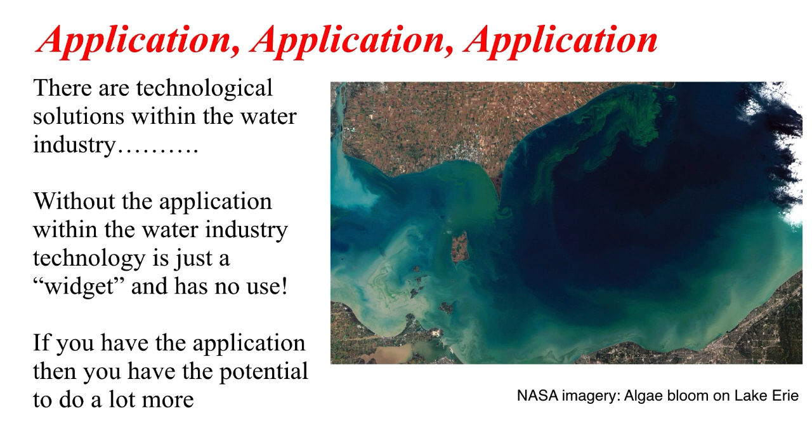The engineers said, we want to put a flow meter on top of that penstock. And for anyone who knows flow, it's not going to work. But also, they wanted it for all 6 penstocks. And of course, if you put flow on each of the areas, the penstocks were going to change all the time, what we call hunting.

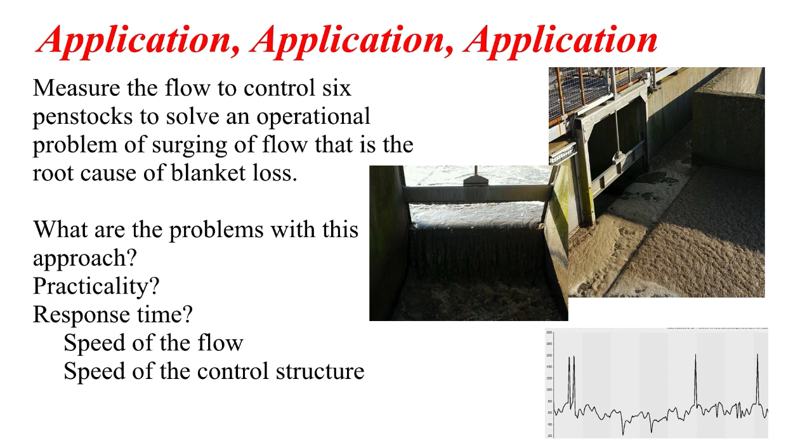But if you do have an application, this is a case study that Swan produced a number of years ago with Yarra Valley Water. It was a very long journey for a smart water solution. And actually some of it was very basic. It was measure, set up district management areas, measure what's going into those areas, what's going out of those areas. Yes, use sounding sticks. Yes, use a number of techniques.

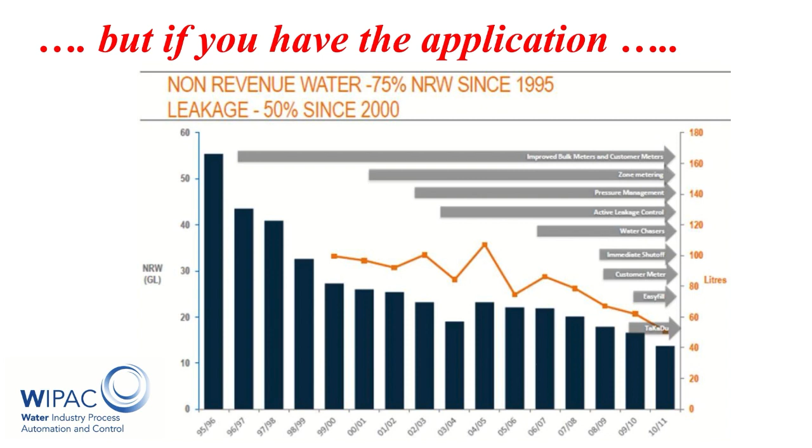The final technological solution made a relatively small difference. At the end of the day, it was a whole suite of solutions. It was basic common engineering sense that delivered a lot of the savings to start off with, but actually great application. The leakage was at the best part of 50%. And by the end of it, it went down to about 12%. Not fantastic, but actually pretty good in modern terms.

But before we get too complex, what are the basics? What is smart water? We've all heard Internet of Things. We've all heard smart cities, big data, small information, data analytics, real-time control, advanced process control, smart water networks, smart wastewater networks, artificial neural networks. We're hearing about machine learning, artificial intelligence, data mining. It's mind-blowing.

But really, at the end of the day, for me at least, and this is a very arguable point, it's a case of using the data that we've got, looking at the information that we need, perhaps doing a gap analysis, perhaps taking instrumentation out, looking at instruments that we don't use, prioritizing the maintenance of the instruments that we do use and we do need, and using that data correctly.

Because at the very smallest, you can actually look. There's a huge amount of data, and I think I certainly put it at the UK producing about 300 million pieces of data every single day. You can't possibly look at all that. But is all that data needed? That actually says 400 million pieces of data a day, but yeah, much of a muchness.

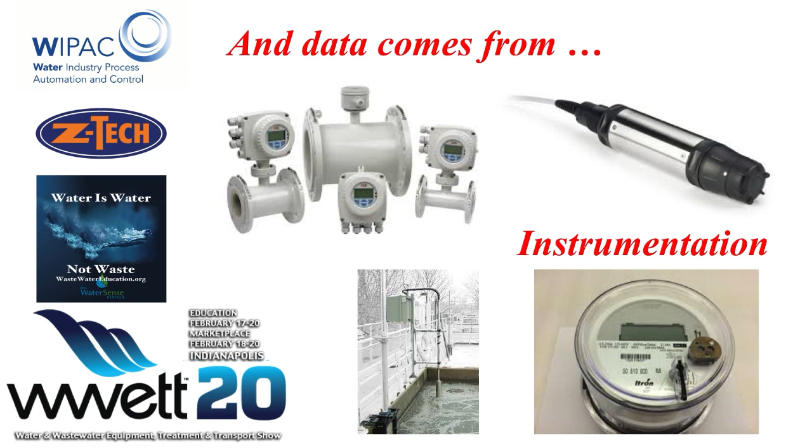We've all heard Sir James Bevan talking about the UK running out of water in the next 25 years. Well, in that case, yes, there's work to be done on PCC. There's work to be done on reducing the water that customers use. And of course, there's work to be done to look at leakage. And this is a massive project in the next AMP for every single water company. But it's how do we use that data? All of the water companies in the UK will have a DMA. Of course they will. How do we use that data from the DMA? How do we make sure that data is right?

And yes, making sure the data is right, maintaining that instrument is absolutely vital, because it only has to be a small amount off on a large meter, and that can account for a huge amount of leakage, which may not be true. It may be meter error, and certainly that's been seen in the maintenance of DMAs, either through bad installation or maintenance problems or whatever. On the Clean Water Network, yes, it's been seen. Yes, it's a problem. Yes, some of that target next AMP is going to be done on the maintenance of instruments. Absolutely fantastic.

But looking at the instrumentation life cycle, I mentioned this in a different way earlier. When you put an instrument in, you have to ask yourself the question, what is the purpose? What am I hoping to get from this instrument? Is it a regulatory purpose? Do I have to have that instrument in place for regulatory reasons? Abstraction monitoring, wastewater discharge monitoring, etc. Maybe. Is it for efficiency purposes? For example, is it for operational efficiency purposes?

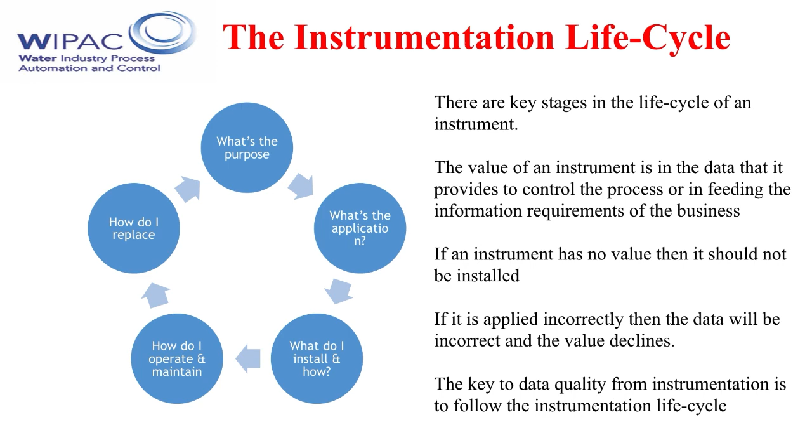And then at the end of that cycle going, well, I'm looking at replacing this meter, but should I? What have I actually used it for in the past 10, 15, 20 years? If I haven't used it, don't install it again. If I have and it's become a vital part of the process, then yes, we will. So we've got to understand the value of instruments more and more. We've got to look after the instruments that we need more, but actually the instruments that we don't need is something that we can rationalise on and save.

But what is that? What is the information? In terms of the smart water industry, it's a case of asking the question, well, what value is the information that we're going to get from this instrument? So in fact, it is part of the people process and it's stakeholder engagement. It's a case of asking the head of a company, what information do you want to see every morning?

And going all the way down through that company to the guys on the front line, what information do you want to see? Doing the gap analysis, saying, well, actually, we've got that already. We just need to shuffle things around a bit. Or actually, we do need to install another instrument here to get that data source, that information source, to allow us to make an informed decision. And once that data and that information is valued, then at the end of the day, that instrument will get looked after. The people and the process will be followed to look after that instrument because there's a value associated to it.

In the past, we've just installed instruments for the sake of it, and the value is not understood. And if the value is not understood, it doesn't get looked after. If it doesn't get looked after, people go, it doesn't work, and we fall into the trap of not using the data that we've got, and the value of instrumentation is not seen, and that means that we don't use it properly.

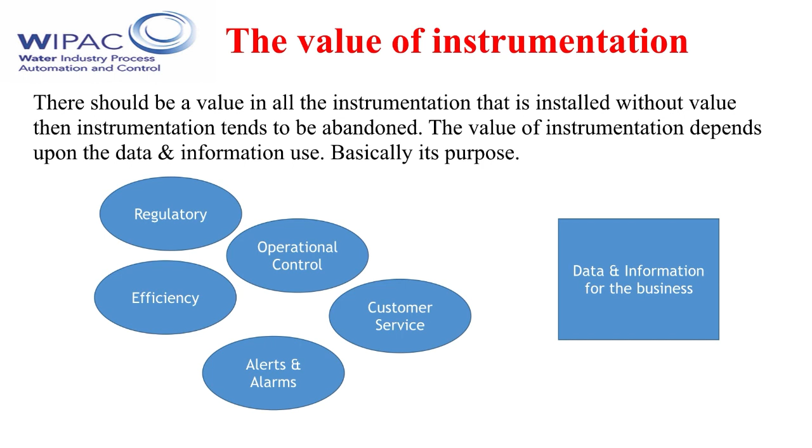But again, it's knowing what that is. Is it regulatory? Is it efficiency? Is it operational control? Is it alerts and alarms? Is it customer service? That all leads to the data and information for the business as a whole. But once you install the right instrumentation, you don't necessarily have to put a complex telemetry SCADA system in.

That means something. If somebody had picked that up earlier, if there was a system in place that allowed that pollution event to be detected, guess what? You could have prevented that whole pollution event from starting in the first place. And pollution events is another big thing in the next asset management period in the UK, as it probably is around the world. We've got some incredibly tight phosphorus consents coming in.

Can we reduce pollution events, stop the phosphorus from raw sewage getting into the river as much as we can by, say, enabling a smart water network to prevent phosphorus consents which are, quite frankly, 10 times lower than the old drinking water consent? That's staggering. Okay, it's an annual average in the UK, but a phosphorus consent that's 10 times lower than drinking water was in the old 1989-1991 regulations.

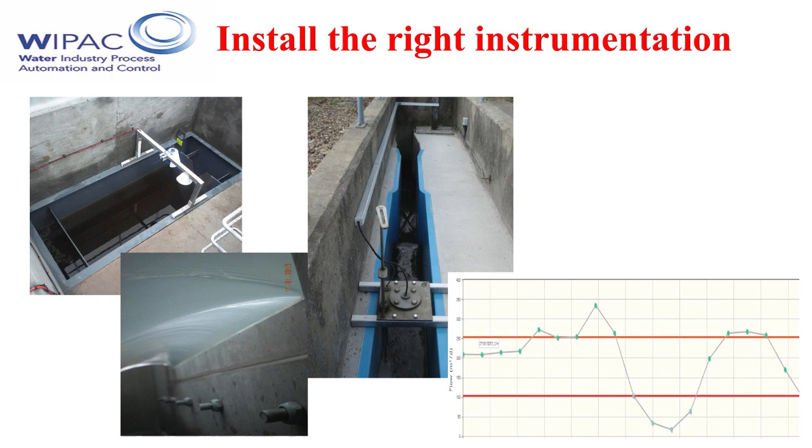You can see an electromagnetic flow meter caked on the inside with what was in fact ferric oxide from ferric dosing. Why did that happen? Because of incorrect dosing, because of incorrect flow measurement. That now is going to cost about 50 to £100,000 to resolve, because somebody's going to have to basically dig out the pipes and replace it.

The classic there, if nobody's actually worked out what the problem is: installation. That flume was actually installed backwards. It will work after a fashion, but of course, in that foreground, you've got some ferric dosing. So actually, are you going to be dosing the ferric properly? Because that flow meter isn't going to be recording properly. It's about getting the basics right. And actually, you can work out quite a lot from just looking at the basics, looking at that level 2.

Is that a problem within the industry? Yes, it is. Yes, there are people out there to help with that. But actually, that basic maintenance means quite a lot. Because on a weir, on a rectangular notch weir, on an electromagnetic flow meter, these can affect the measurements and hence the data quite a lot. I've certainly heard the argument of, yes, well, we can tidy up that data at another time. We can tidy it up with algorithms.

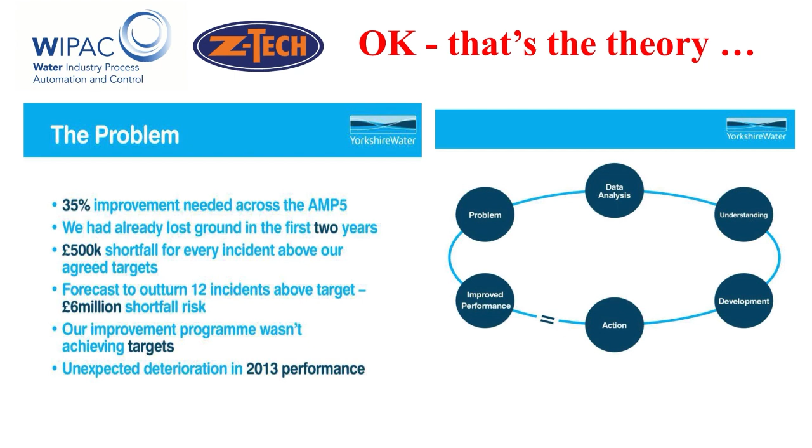Yorkshire Water's performance was suffering and needed improvement. They were taking a cyclical approach, basically saying, okay, we'll clean this because we know we should, based upon X, Y, Z. They weren't looking at what was happening within the system. They actually had the data, but they needed to rearrange the way they looked at it and the way they designed their process response. And that's when they developed this blockage timeline and achieved a 21% reduction in pollution incidents.

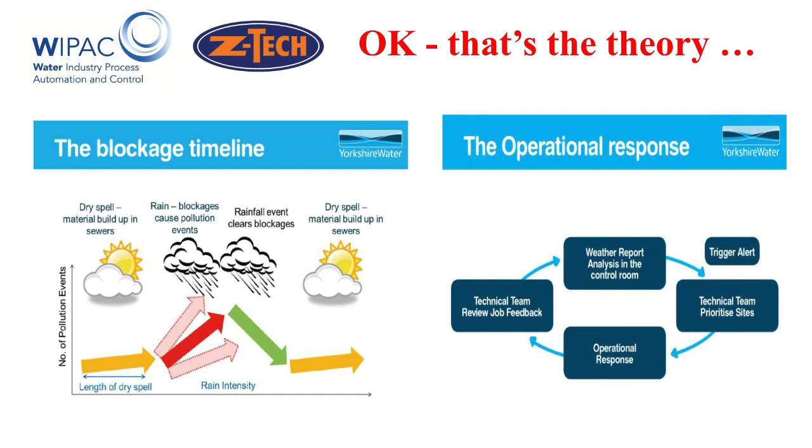Now, most water companies would go, 21% is amazing. That's fantastic. Let's keep going. What else have we got to do? And that was changing that cyclical approach.

Years and years ago, a chap called Jody Cockroft of MWH did a project for Southern Water down at Eastney. They had 2 flood events very, very close to each other, almost 20 years ago now. 300 properties flooded, 530 externally flooded, and the Portsmouth Naval Yard. Portsmouth Naval Yard, of course, was a strategic defensive asset, and it was not good that it got flooded and affected the defence of the nation. So it all went to the House of Lords.

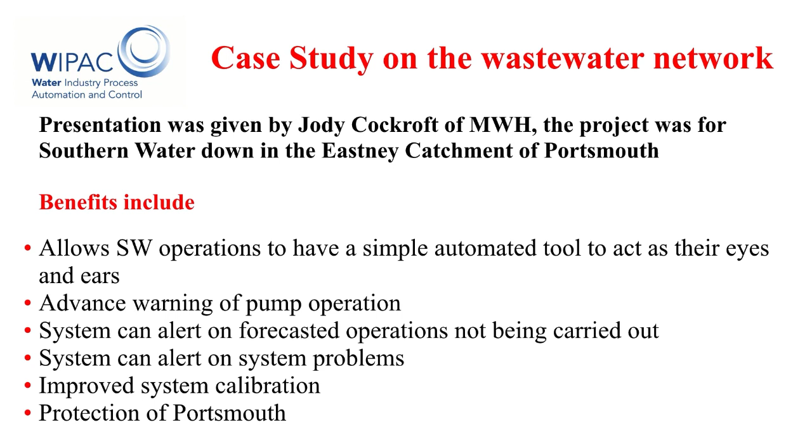And that Eastney project did look at the whole system, how to bring the technology, the people, and the process together. And it was an incredibly smart system. But often, where is it all? Yes, with Eastney, they had a look. The sewer level monitoring was a problem. But again, we've got to treat the whole system together and see what we can do to play tunes within the system to get the system working as a whole.

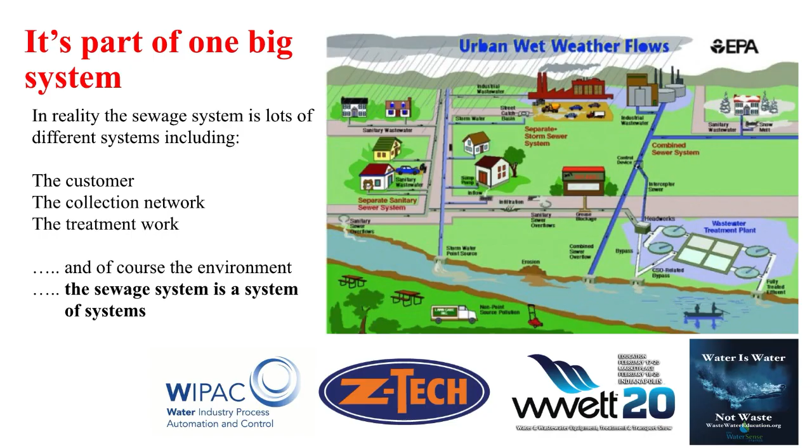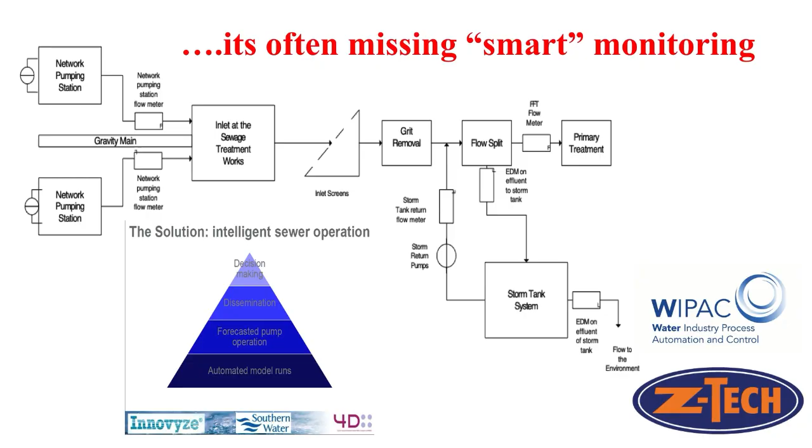So I'll go forward. A study done by Professor Butler and Fanlin Meng as part of her PhD at Exeter looked at operational control-based permitting. And the one thing that picked this up is something where I think we as an industry should be going, which is looking to control within the network, looking to control through the process to treat as much of the flow as possible. Can't always be done, and if you get a storm that goes over the capacity, then okay.

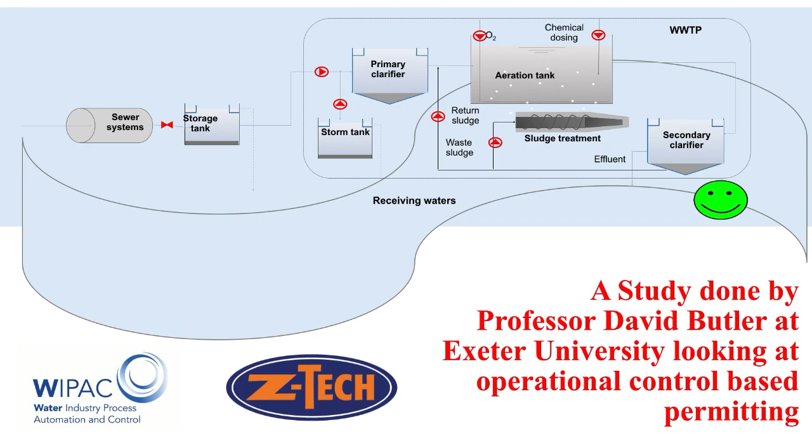But the work that Fanlin Meng did, which was absolutely fascinating, and she presented at a workshop that I was hosting, was definitely the case of, do you know what? We can get a lower cost at the treatment works for better overall environmental quality. So we can get a better outcome for less money. And if you say that to somebody, they're going to go, well, how do we do it? Unfortunately, it is difficult. And here's what Fanlin showed.

But at the end of the day, the Environment Agency brought out operational risk based on process-based control. But really, the financial benefit just wasn't there, because we didn't look at all the benefits. If we did have operational process-based control-based permitting, then we could get a better result for less money. And that's probably where the benefit lay. Unfortunately, the feasibility study didn't point out that eventuality. Maybe it's a case we look at that again.

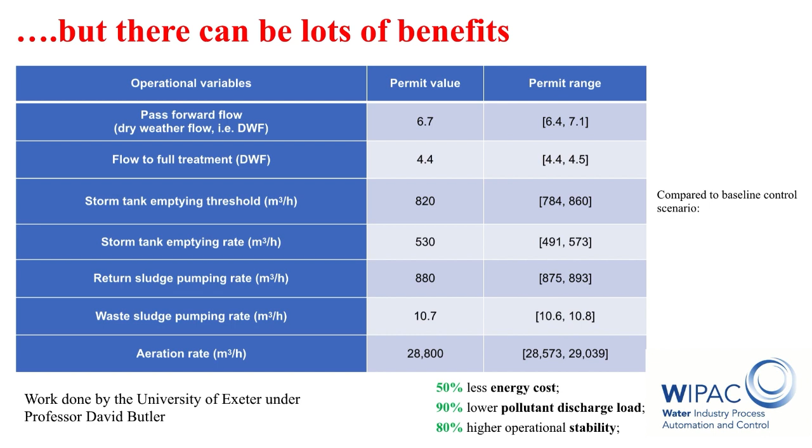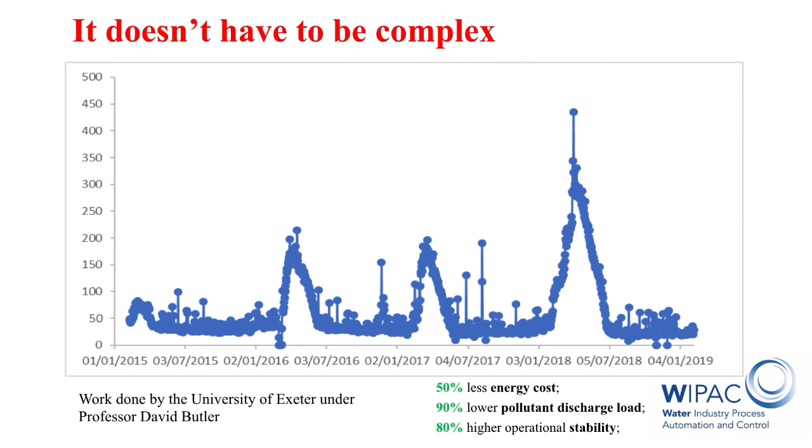But it doesn't have to be complex. This is a case study from a works that I know very well. And smart water is not going to solve the problem, but we have the technology for a smart water industry, but what does this actually mean in practice? We heard earlier this year in the UK, Sir James Bevan talking about the jaws of death and the water industry in the UK running out of water.

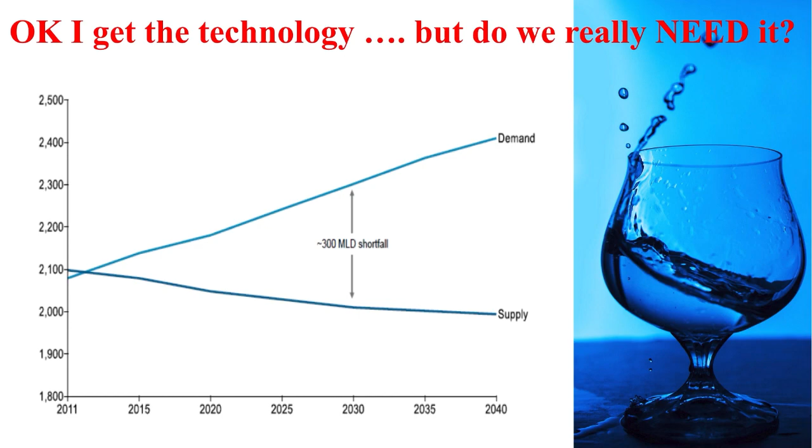What we can see in this graph is an example from a few years ago. But yes, demand outstripping supply. In this particular case, 300 megalitres per day shortfall. What we can do about this is actually probably a multifaceted approach. This case study is one I mentioned earlier, is from Lisbon, Portugal, and was delivered by Andrew Donnelly and the local water company, EPAL.

Subsequently to this, in a presentation earlier this year, Andrew Donnelly presented that things had crept back up. But they found the root cause of the problem was mainly on the trunk mains, and so addressed the problem, and again the leakage percentages were back down. So this is using the data that we have within the water industry to a good extent and finding out where the problem is, rather than just taking a routine replacement asset management strategy.

But actually leakage reduction isn't enough. And this is where we've got to look at how we can use AMR, how we can use AMI, how we can use smart meters to address the problems of customer side leakage, which we know as an industry is a massive problem, but also per capita consumption. In the UK, our per capita consumption is around 140 to 145 litres per head per day. Other countries much higher. Where you have it much lower, in countries such as Denmark, it's because there is a culture that doesn't allow the wastage of water.

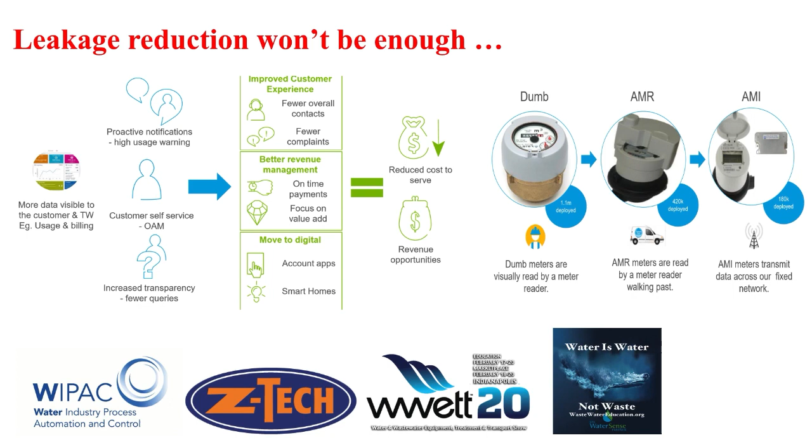If you haven't got that naturally within your culture, then there's work that can be done using smart water meter data and influencing customers to get reductions in the consumption. And this we can see in the next case study. This was something done with Anglian Water in their shop window and a company called Advizzo. And as we can see, 4,500 properties in the trial, 18,500 litres of water per day saved, and roughly an 8% reduction in per capita consumption over that time period.

It isn't just per capita consumption, it isn't just customer side leakage, it isn't just the leakage that the water companies are responsible for. It's actually a combination of a variety of different sources that the industry is going to have to look at. And this is where the smart water industry becomes a tool to drive this together.

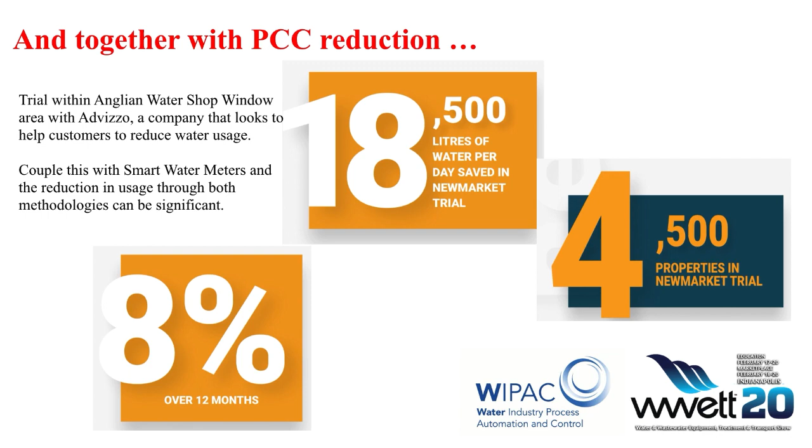We've come a very, very long way since Bazalgette. We can no longer build giant sewers. We can no longer build 120 miles of triple line brick sewer as Sir Joseph Bazalgette did. Coincidentally, we are, of course, doing that with the London Tideway project. But that is an exception rather than a rule. We've got to look at how we can not just deliver something from an infrastructure point of view, but deliver it in operational management. And that is where the smart water industry really comes to its forefront.

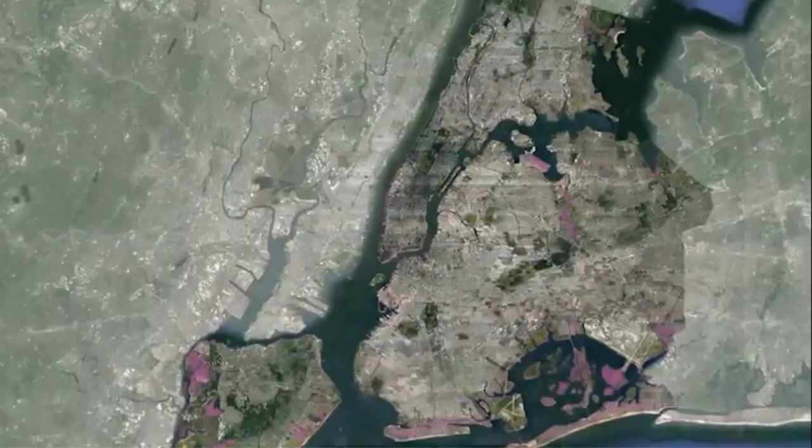After Sandy, Horton's data was used in modeling to see what New York would look like with 6 feet of sea level rise by 2100. So this is a satellite map showing New York City without any flooding. Shown here is Broad Channel, the Rockaways, Lower Manhattan, and over here is Staten Island. If you get 6 feet of sea level rise, the everyday average high tide is going to start flooding a lot of neighborhoods. It's high tide in 2100.

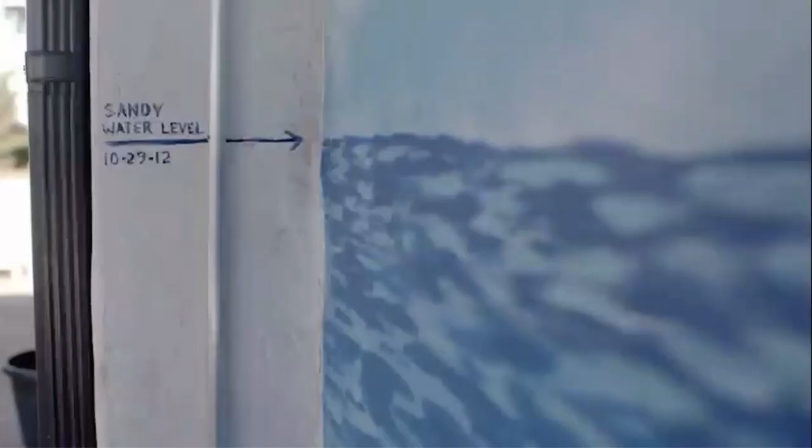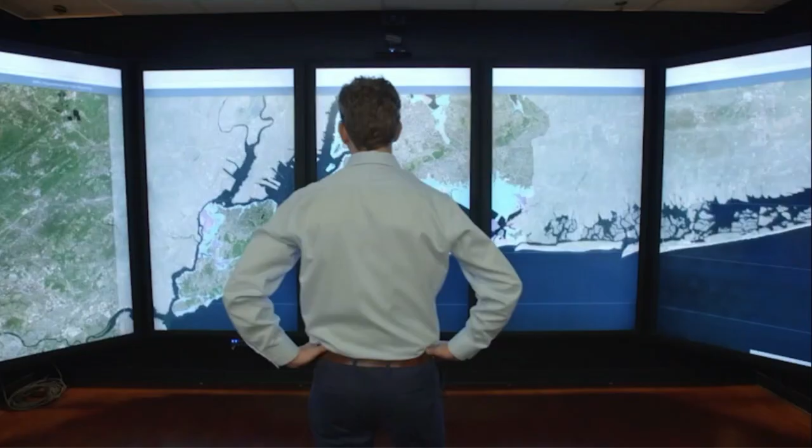This is now showing tidal flooding of places like South Street Seaport, Lower Manhattan, a lot of flooding around Jamaica Bay, also on Staten Island. Hundreds of thousands of people being flooded at that point. It's uninhabitable when you start getting flooded so many times per year. That's tidal flooding, but then there's also storm surges. We can also look at what 2100 would hold if we had a very severe storm like Hurricane Sandy, plus 6 feet of sea level rise.

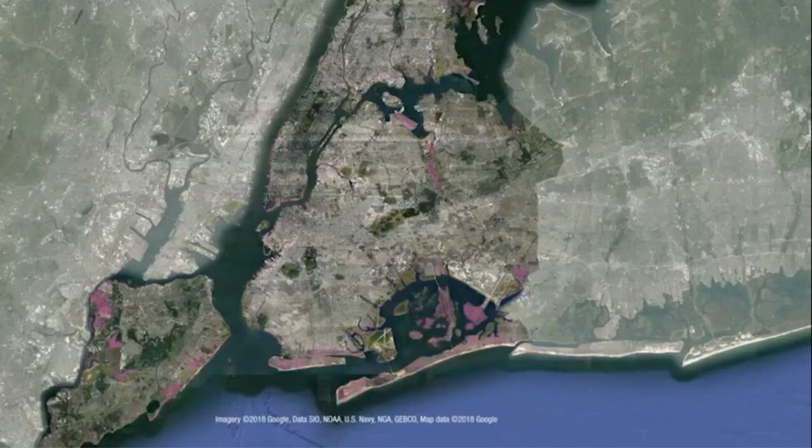A much larger percentage of the coastal zone is flooded. The west side of Manhattan, the Tribeca district, Wall Street, Battery Park, Lower East Side. Sandy flooded 51 square miles, 17% of the city. With 6 feet of sea rise, those numbers would be closer to 100 square miles, or about a third of the city underwater. This kind of flooding would be catastrophic.

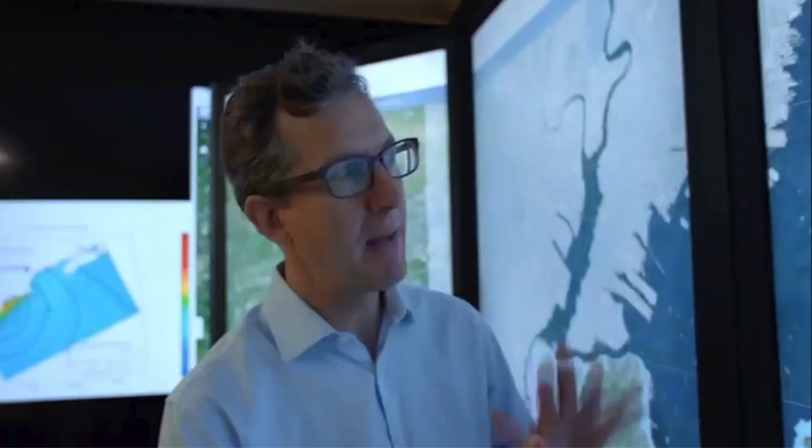There's massive infrastructural elements for a city of 8 million people that are in the flood zones. Transportation system, the tunnels, the subways, the electrical system, and of course a lot of these things were flooded just by Hurricane Sandy, so if you envision 6 feet of sea level rise, then a great deal more is at risk at that point. The whole city could be disabled in this kind of flood scenario.

I don't think there's a one-size-fits-all answer to whether we should build or not in the floodplain. There's hundreds of thousands of people in New York City that live in floodplains. And I think there are probably some cases where it just simply doesn't make sense, where it's not just a floodplain, it's a highly vulnerable floodplain. Retreat in that instance might make sense. What this means for the future, it means seawall or levee protection, storm surge barriers, or the city could encourage more building and population on higher ground and do things to try to discourage or buy people out who are in these low-lying flooded areas.

There are some clear statistics out there that for every dollar we invest in risk reduction, there's a $4 avoided future cost. Sandy was a $19 billion event in terms of damages and lost economic activity. From the risks of climate change, that same event in the 2050s could be a $90 billion event. I think we have to prepare for the unexpected. And what that means is, how do you create a city that can recover from any number of tough things happening to it, whether it's a flood or a tornado or a terrorist attack?

Cities are vulnerable. Cities have always been vulnerable. Cities also have this extraordinary way of being resilient and building back. And so, to me, it's always about the basics: mobility, power, water. Fixing this is not rocket science, right? It's simply a question of will.